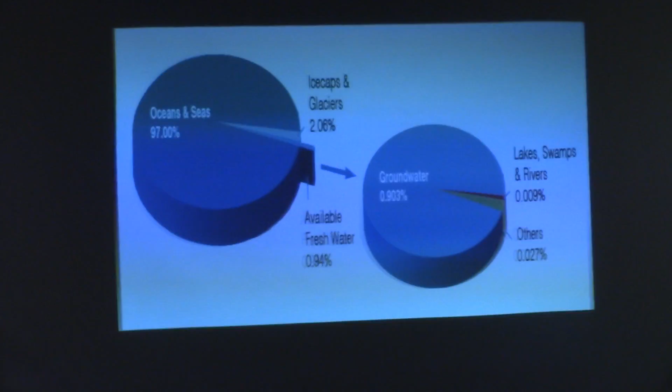97% of the water in the world is in the oceans. That's a whole lot of water. I googled the other day how much water is in the oceans, and there's this number with a whole bunch of decimal places and exponents — it's ridiculous how much water is in the oceans. And maybe not here, but in a lot of places, water is a super scarce thing. So why not pull water from this unlimited supply we have from the oceans? The answer is because it takes a whole lot of energy to do that. So if we can use waves to do it for us, we can probably get really good access to this kind of water in a lot of places.

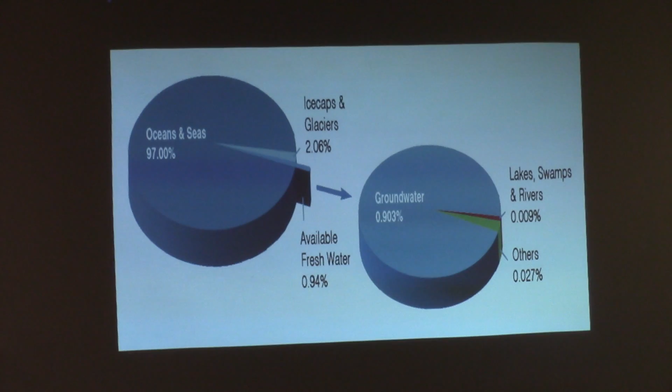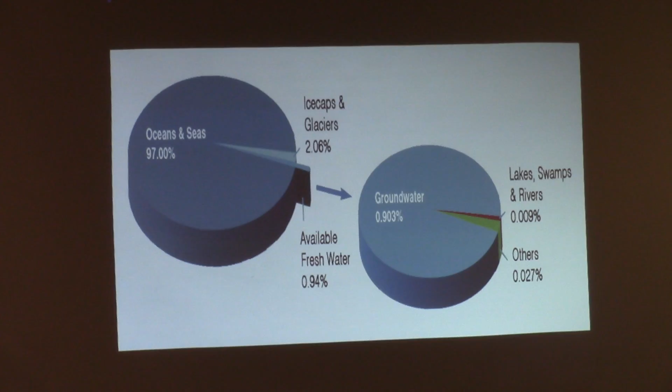So 97% of the world's water is in the oceans. A little over 2% is locked up in ice caps and glaciers, and less than 1% is available fresh water. So less than 1% of all the water in the world is fresh water — not even necessarily drinkable, but something like water in a lake. There's a whole lot of ocean water out there, and not a whole lot of fresh water. I'm not even going to talk about groundwater, or the tiny bit of water in lakes, swamps, and rivers — there's a lot of groundwater, but let's skip that.

This is Huntington Beach — I thought this was a cool picture. You've got some guys catching waves, and then this big desal plant in the background. This is in California, and that's what a large-scale desalination plant looks like. I think this is a thermal desalination plant, judging by the stacks, unless that's a power plant. A lot of times they build desalination plants next to power plants, which is actually pretty cool — a perfect example would be the nuclear power plant in Brunswick, down in Southport.

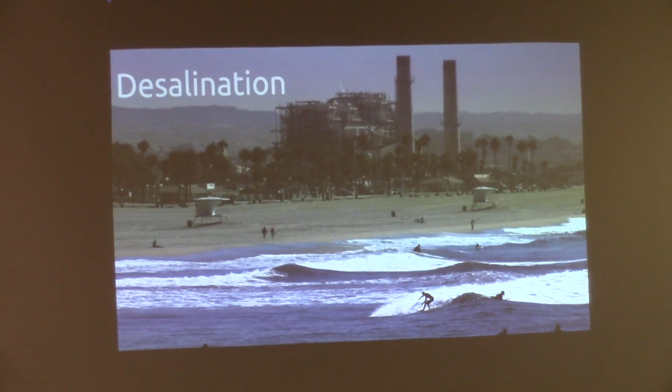It generates a whole lot of heat, and that's kind of a byproduct. If you've ever been in Southport and seen those canals running through it, with a couple bridges crossing over this really straight canal — what happens is the power plant sucks in river water, uses it to cool the plant, and then this warmer water comes out and runs through the canals to cool down a bit, before being pumped out offshore in front of Oak Island. That's just what needs to happen for a power plant right now — it's called residual heat removal.

Desalination, there's a few ways you can desalinate water. You can use a membrane, or you can simply boil water. If you could use that waste heat from a power plant to boil water, it's a pretty cool use of it, because otherwise it's just something you're going to throw away. So a lot of times we see power plants built right next to desalination plants, and the desal plants will use the waste heat. It's the same way in the Navy on submarines: they have nuclear submarines, and they'll use the heat from the reactor to run a distillation system which boils water, and that's how they make water for themselves on submarines.

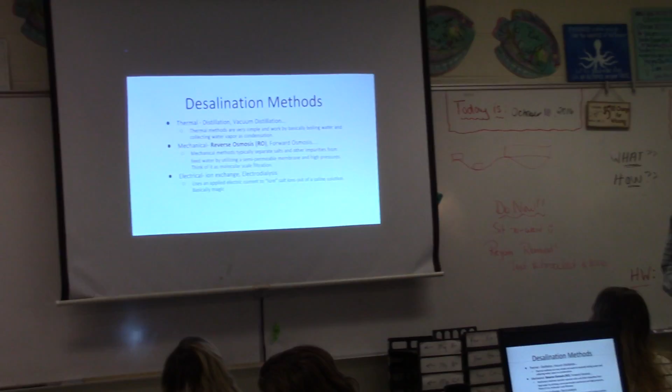So there are three main types of desalination: thermal, mechanical, and electrical ion exchange. Thermal is really simple, you're boiling water and you get steam, that's water vapor that comes off. Think about making ramen, and you lift up the lid of the pot, and there's all those water droplets on the lid. That's all really clean water, and if you can collect that really clean water, you can drink it. So that's how thermal desalination works, by basically boiling water and collecting the vapor.

You can also use vacuum distillation. Did you know you can boil water at room temperature? Does anybody know how? Yeah, reverse pressure, like a vacuum. So if I were to take this bottle of water and hook a vacuum pump up to it, the bottle would probably crush before this happened, but the water could just start to boil right here at the table because you're taking out the air pressure that's pushing down on the water and holding it all together, and the water will just kind of fall apart almost and boil right there at room temperature. That's a way some people can desalinate water, by hooking a vacuum up to a bunch of water, and then it boils at room temperature, and you collect the vapor, and you have water.

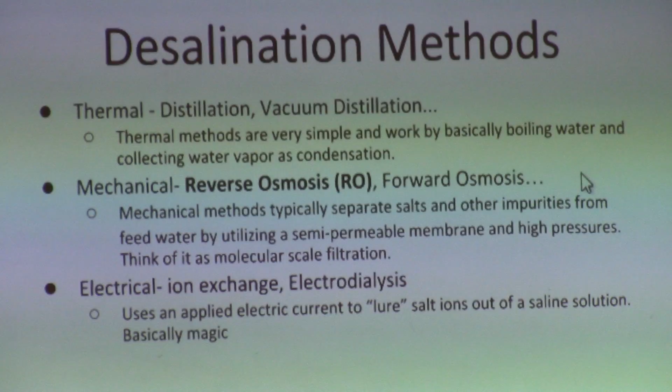Mechanical means are basically membrane-based methods, like reverse osmosis and forward osmosis. This is a little weird, ion exchange also uses a membrane, but we'll pretend that's not there. Basically these mechanical means use a membrane, and I'm going to pass these around in a second, so the next slide shows how membranes work.

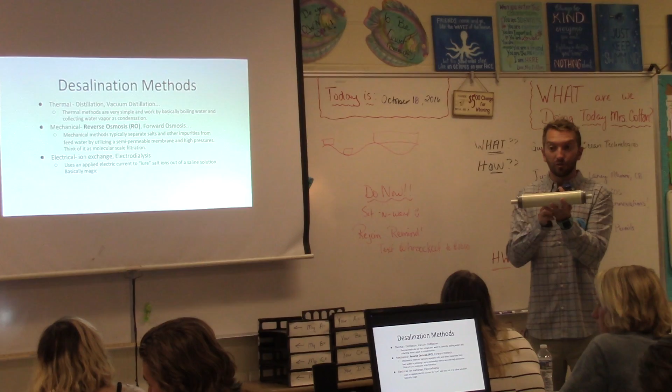These membranes are essentially like molecular-sized filters. You have salt molecules, which are kind of big and bulky, and water molecules are a little smaller, and they're attached. Salt really likes to be with water, which is the reason it takes so much energy to separate them. If you force really high-pressure seawater into this membrane, that pressure through reverse osmosis causes the salt bonds to be ripped, or the salt to be ripped apart from the water molecules, and water molecules can permeate through this membrane and collect in the center as fresh water, and you get clean water out. I'll get into more detail about that in a second.

I'll pass these around. And then the last kind, which is more of a lab technology, I'd say, like lab scale experimental technology still at this point.

There's some places that kind of use it, but electrical means could be ion exchange or electrodialysis, where salt has a charge. Salt is an ion, so if you put voltage in water, you can cause salt to want to be over on one side of a vessel, a container you could say, and the fresh water stays on this side. So you can actually attract salt molecules away from water using electrical charge. It's basically magic, and it's not super commonplace at this point.

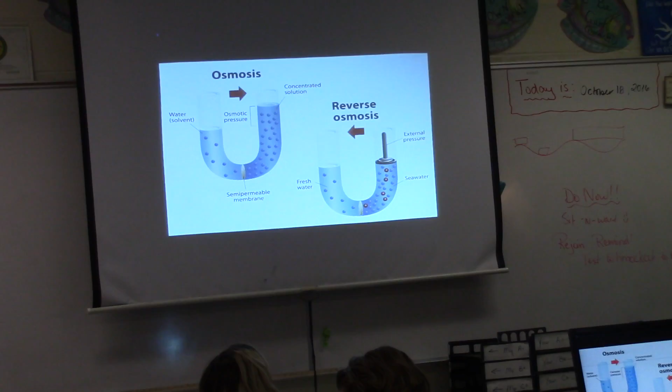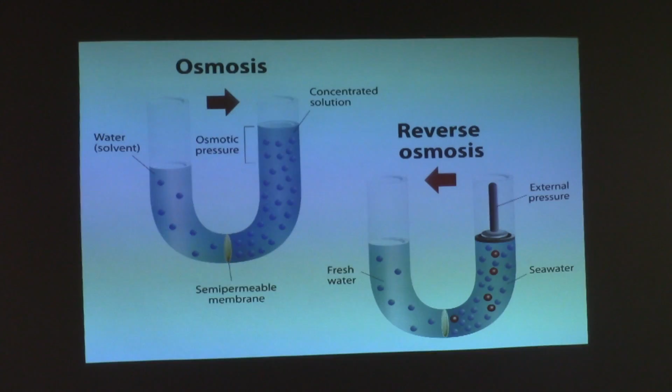So reverse osmosis, did you guys talk about osmosis in biology? Yeah, so it's like how liquids permeate through a cell membrane, and it's because a liquid of higher concentration... if you have a liquid of high concentration, like here, there's a whole lot of stuff, we'll call it salt, on this side, and then low concentration, there's less salt on this side. These two concentrations want to even out just by osmotic pressure.

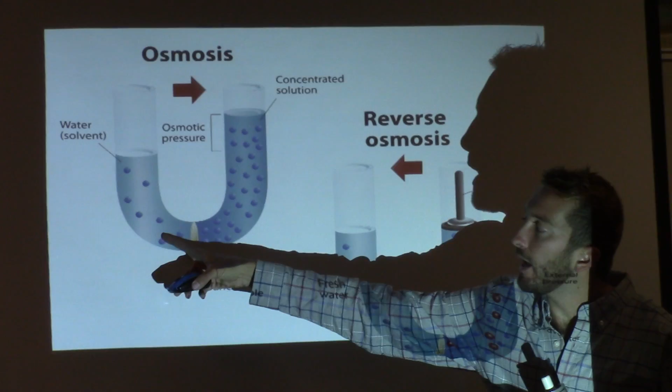The salt wants to pass through this membrane and balance out the two solutions, and that's called osmotic pressure. In the case of seawater, that's about 400 psi. So just putting two different concentrations of water on either side of the membrane, there's like a 400 psi differential pressure in between that membrane trying to keep the two apart.

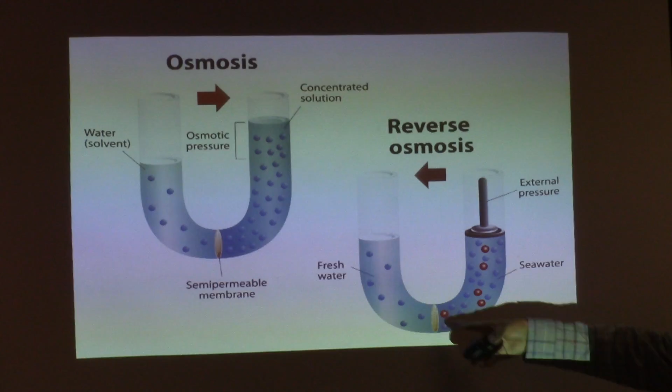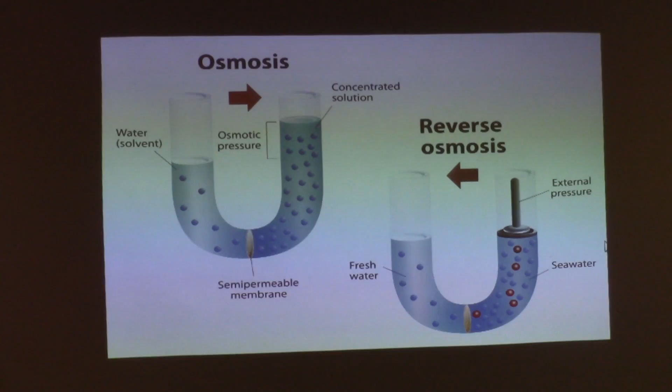It's really crazy. So reverse osmosis is, as it sounds, the reverse of that. If we have a lot of salt here, say seawater, and fresh water here, with this membrane, and you push really hard with like 800 psi, you can overcome that 400 psi differential pressure that's trying to push everything the other way, and you can actually separate the salts out in the reverse direction. The easiest way to think about it is like molecular filtration, but it's chemically a little more advanced than that. Honestly, it's kind of over my head how the chemistry in this thing works.

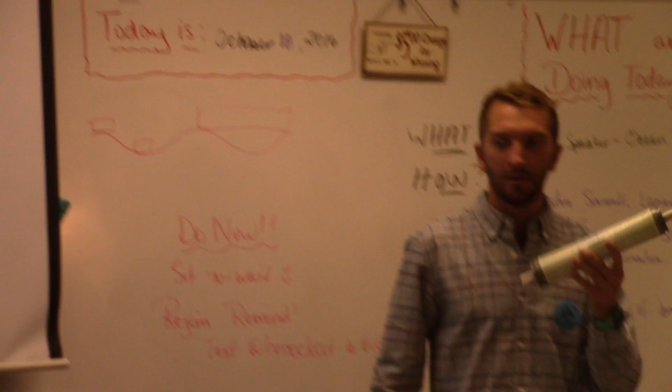So this is a reverse osmosis membrane, I'll pass these around. These are literally exactly what we found on a yacht. A lot of high-end boats will have water makers, a lot of sailors that go out on long trips don't want to bring their water with them, so they'll have water makers on board. I think this is a 150 gallon a day membrane. I'll pass these around if you guys want to see them.

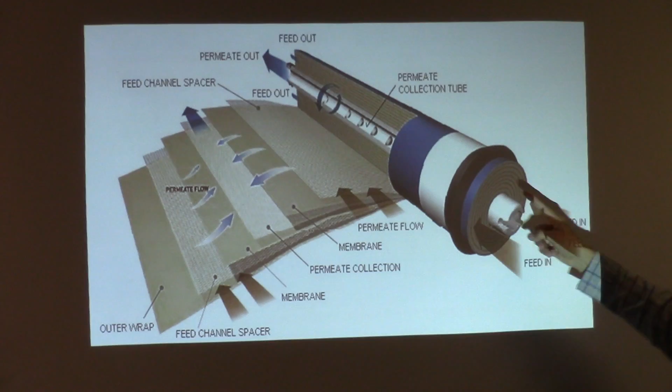What happens is you feed water into one end of the membrane. There are holes here, this one's kind of wet, and you pack in a whole bunch of seawater into this side, and then water makes its way down the membrane. There's a spiral wound element, and each of these spirals are different layers of membrane that fresh water is able to permeate through — basically it's like a sandwich.

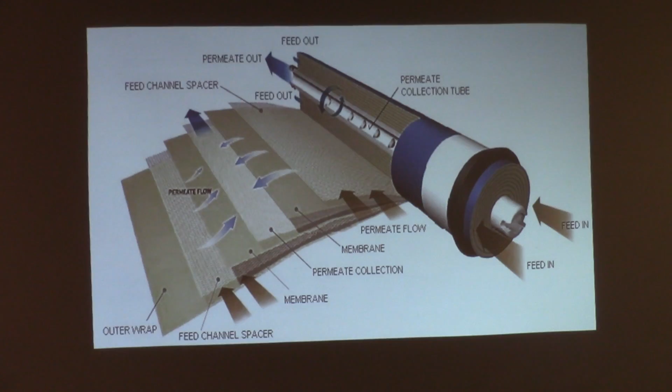Say that this is one leaf of a membrane. Fresh water passes through this membrane and makes it into the center of this layer. Then from the center of this layer, it spirals all the way around until it gets into the center tube — that's where the fresh water comes out. So if you were to hook this up to a real system, you put feed water, seawater, in this end, you get your fresh water out of this end, and out of these holes you get your brine.

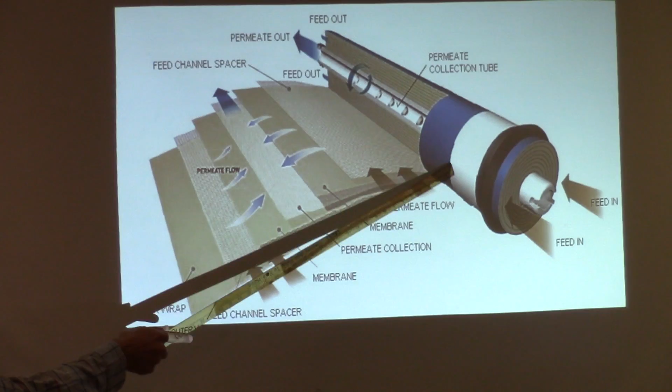As the water enters here and passes down the membrane, fresh water starts to seep out through these membrane leaves. By the time the seawater gets to the end, a lot of the fresh water is gone, so this is where your salty water comes out.

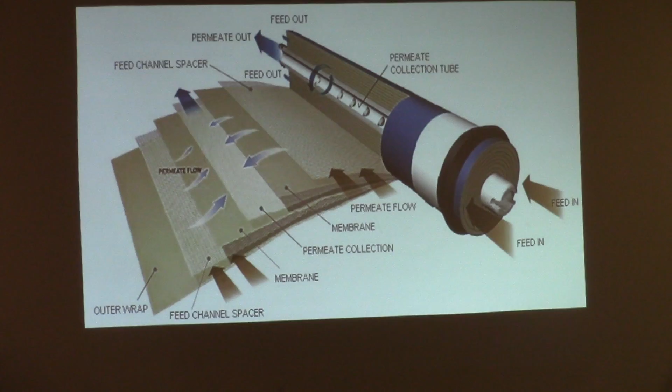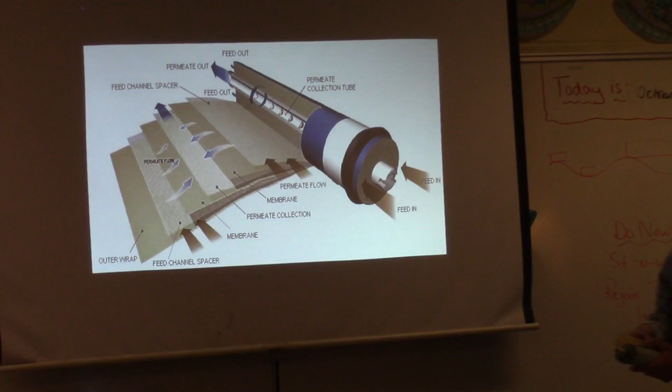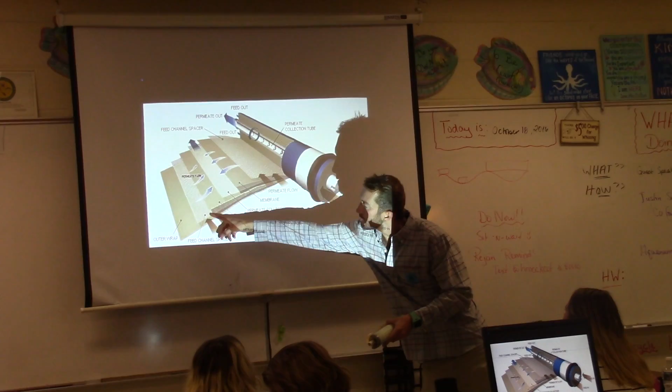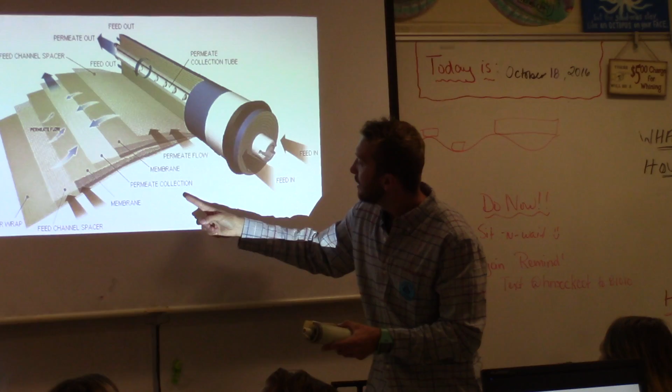I forget what material the membranes are made out of, but it's crazy how they make these things. You have a few different parts to the membrane. You have the actual membrane itself, which has a paper clip on it in this one. Then you have what are called feed spacers, which are like meshy materials — a feed channel spacer that allows the water to work its way around the membrane and cover the membrane area. And then you have a permeate spacer, which is kind of the pathway for the permeate collection — a pathway between the two membrane sides that allows the clean water to travel through to the center tube of the membrane. You guys can check these out as well if you want to see them.

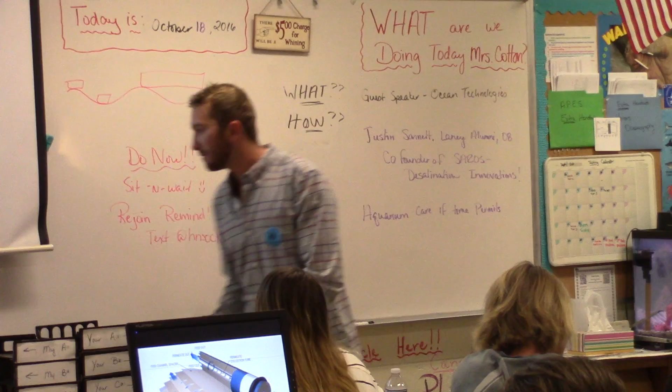The ones that we're going to be running in the latest buoy are 40 inches — I think it's just one. These are 2.5 by 14-inch membranes. The ones we're going to run in the latest one are 2.5 by 40, so it's the same diameter but about 40 inches long.

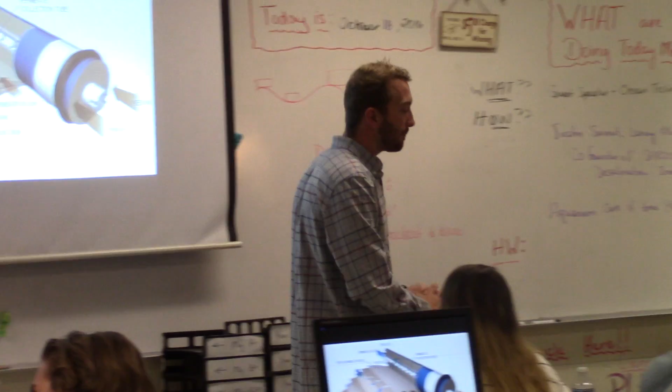This one is 36 inches long; others are longer. If you treat them properly, they're good for about 5 years. We're not going to treat them really great, just the way our system runs, so we may get 3 years out of them. They're not super expensive — those membranes right there are about $150.

So if you can get 3 years out of $150, it makes economic sense. And how you treat them well is you just remove a lot of the junk that's in seawater before it can get to the membrane. So we have pre-filters that remove sediment, plankton, sand, whatever, before it gets into the membrane.

So whenever the 3 years is up, do you replace all of them, like all the membranes and lines, or just part of it? On our system, the membranes are on land. The only thing that's out in the ocean is the pump, which is kind of the engine for the process. That's cool because when you replace the membranes, you don't have to have a guy go out there with a boat to switch them out. You just take 2 screws out, pop the cap off, and those things slide out of this tube, and you swap new cartridges in.

So how long are the buoys good for? Do you have to replace them, or are they good for a long time? Each buoy is designed to last about 10 years, and that's what we're basing the economics of the system around.

We need to know how long it will last to figure out how much our water costs, because if you have to replace the buoy halfway through, it makes it more expensive. Our buoys are designed to last about 10 years, and they'll probably need a biannual, every-2-year kind of overhaul where you replace a couple components. Simple stuff—we're making sure the buoy is ultra simple. If a part doesn't need to be on the buoy, we're putting it on land. So the only things that are on the buoys are there because they need to be there, and anything that needs to be worked on can be fixed by anyone. That's really a strong focus we're trying to make sure of.

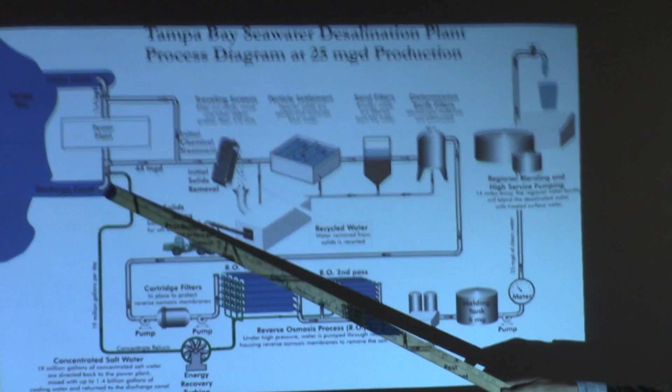This is a large-scale desalination plant, to walk you through the process. So you have the ocean, and then intake tubes that suck in seawater. It goes through a strainer, which basically removes sticks and stuff, so you're not sucking in seagrass.

Then they put that water into a settling tank, which is literally like a swimming pool, where the water sits at very low current and sediment falls out of suspension, so you get this mud at the bottom. Every now and then you have to go in there with a bulldozer, drain it, hose it out, and drain out all the sediment. What that does is allow sand and stuff to fall out.

This is how a large-scale plant works—this isn't how ours works, we don't have a settling tank in our system. From the settling tank, you run it through sand filters, like a swimming pool would use. Then it goes into diatomaceous earth filters—not super common, but basically these remove sediment from the seawater. Then it gets pumped to a really high pressure pump, goes through more filters, and then into the reverse osmosis membrane.

In a lot of plants you won't see just one membrane—you won't see one membrane in a Carlsbad plant. I think they have like 20,000 membranes in that thing. It's crazy, so you'll see banks of membranes. The seawater goes into these membranes, and then it's separated out into freshwater.

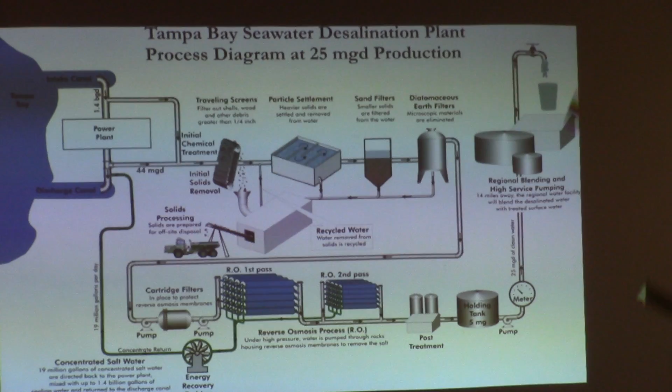So these tubes are the freshwater that go into a post-treatment and a holding tank. A post-treatment might add a little bit of chlorine, like city water has a tiny bit of chlorine just to keep it sanitary. They may actually remineralize it in some cases.

Sometimes with reverse osmosis, if you run it right, or long enough, the water can be so clean that it doesn't have any minerals in it, and that's called aggressive water. What that means is that if you put it in a pipe, the water wants those minerals so bad it'll steal them from the pipe, and then the pipe will start to fall apart.

And that's actually part of what happened in Flint, Michigan, with that water issue they had. They had mineral leaching, and then they tried to fix it by injecting another chemical, and they put too much of that chemical, which messed things up. But anyways, that's what post-treatment can look like, and then you've got your fresh water here.

But this is something cool I wanted to mention. This is called energy recovery, specifically an energy recovery turbine. This is really sweet. Of all the water that comes into the membrane, maybe 20% comes out as fresh water. The other 80% is still 800 psi seawater, and because it's at 800 psi, it still contains a lot of energy. Otherwise, you'd just blast that back out into the ocean and waste that energy.

What an energy recovery turbine does is take that high pressure exhaust, basically that waste product, and use it to spin a turbine, which generally helps push the pump along. So it uses the pressure still in the waste product to help move the pump that builds new pressure—it recycles energy.

It's very similar to how a turbocharger works in a car, using waste exhaust gas to help pump new air into the engine. It's kind of the same thing for reverse osmosis. With this, you can boost efficiency, almost quadruple it, sometimes by factors of 6. We have energy recovery in our system, which is really, really sweet.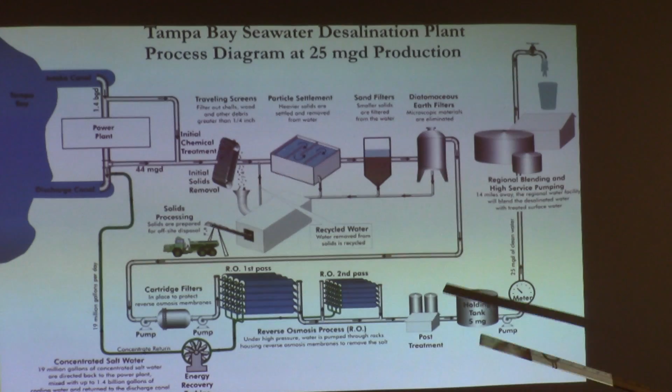So, all right, cool. How much time do we have left? 30 minutes? Well, not quite—the bell rings at 8:29 now. Okay, well then we'll go right into ocean energy then, because this is really cool. It's probably my favorite part of the whole presentation.

This is what ocean energy looks like. You may look at the ocean and not think there's energy in there, because a lot of people think energy is just electricity. But energy comes in all kinds of forms—you probably learned this in physics. You can have thermal energy, electrical energy, kinetic energy, potential energy. Energy comes in all these different forms, and in this case, that's energy—just moving water.

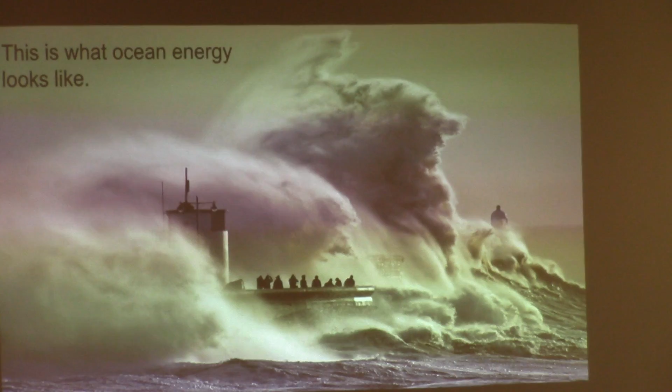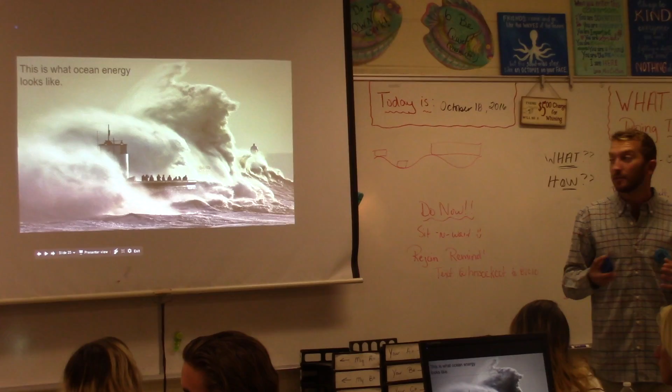Think about a hydroelectric dam, how they take moving water from a river and use it to spin a turbine and generate power. It's a kind of the same process with ocean energy, but they use the motion of waves and tides in different ways to spin a generator or move pumps and things like that.

There are 3 main types of ocean energy. Tidal is pretty self-explanatory—it uses the ebbing and flowing of the tides to generally spin a turbine, like a wind turbine. Just as a wind turbine uses air current to spin a big fan, you can use tidal current to spin an underwater fan and generate power. It's really similar to traditional hydropower.

Wave energy uses the kinetic energy of ocean waves, the motion of ocean waves—that's what we use for our system. The ocean is always moving, and there's kinetic energy there that you can harvest and put to work. Then there's ocean thermal energy conversion, or OTEC, which generates energy based on the temperature differential.

You guys probably talked about thermoclines. I learned that word in third class. There's a big temperature differential between deep cold water and warm surface water, and believe it or not, there's actually a way to get energy out of that, which is also kind of like magic.

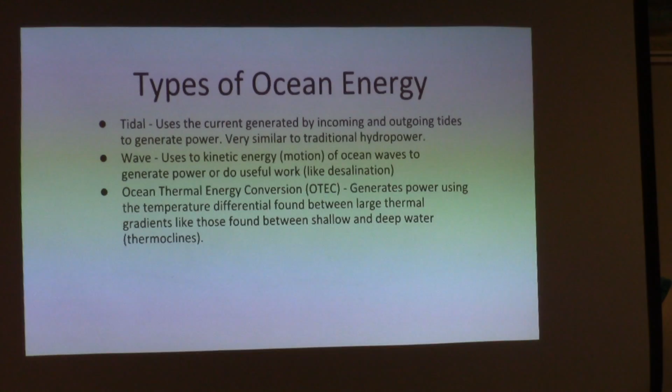And I'll go through that in a second too. So there's challenges to ocean energy.

The ocean energy industry is kind of in its infancy, and its technology is still being developed. Just like we're out in front of Massachusetts ironing out wrinkles with our buoy, people are doing the same thing with their technology. So corrosion is an issue, storm survivability is an issue. There's biological things that are an issue, like the barnacles, and the environmental impacts that need to be studied.

Cost and economics are big issues right now. For corrosion, if you can make everything out of stainless steel on your device, it would last forever, but that's really expensive. And if your machine is really expensive, there's no way the power you're generating is cost effective, because your machine is just so ridiculously expensive to make.

Predictability is one that people are working with. It's an advantage to tides because tides are very predictable. Tides come in 4 a day, 2 high tides and 2 low tides, and they're really predictable. My watch will tell you what tide it is, and it's not connected to Wi-Fi or anything - it just knows what the tides are supposed to do.

Where waves aren't very predictable - waves are always changing. And that's a challenge, because if somebody needs a lot of power and there's no waves, they have to find some other way to generate it.

And then permitting and the unknown - that's the thing I was talking about, they just don't know the effects of some of these yet. Like I said, I doubt there are going to be any serious effects, people just don't know what any effects would be.

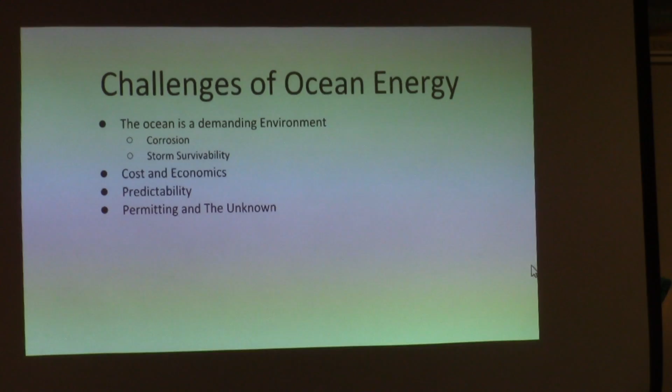So tidal power, I'll play this video. Take a breather, that's it. This is what your stereotypical tidal power concept would look like - it's basically an underwater wind turbine.

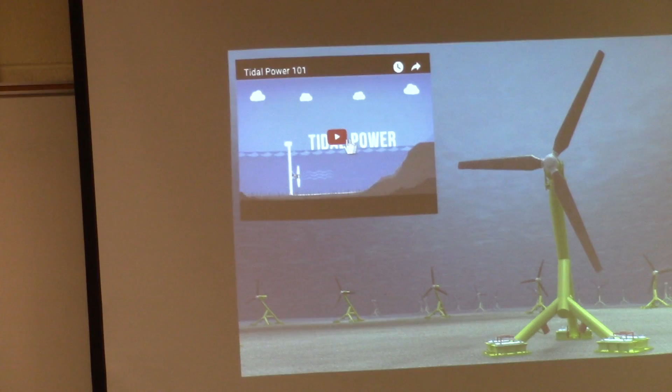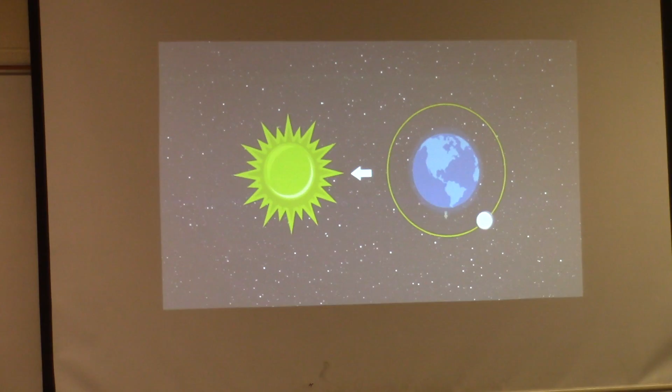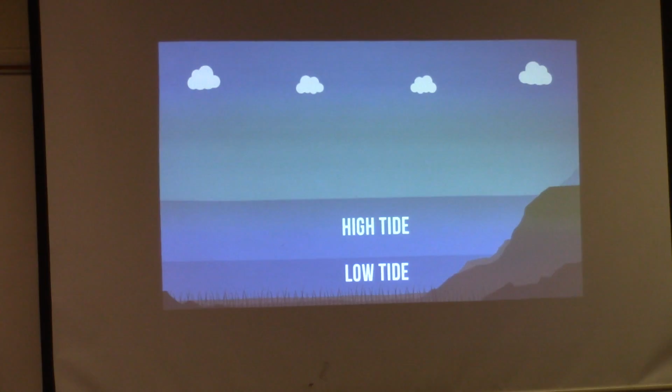Tidal power is a form of hydropower that converts the energy from the natural rise and fall of the tides into electricity. Tides are caused by the combined effects of gravitational forces exerted by the moon, the sun, and the rotation of the earth. Tidal plants can only be installed along coastlines. Coastlines often experience 2 high tides and 2 low tides daily. The difference in water levels must be at least 5 meters high to produce electricity.

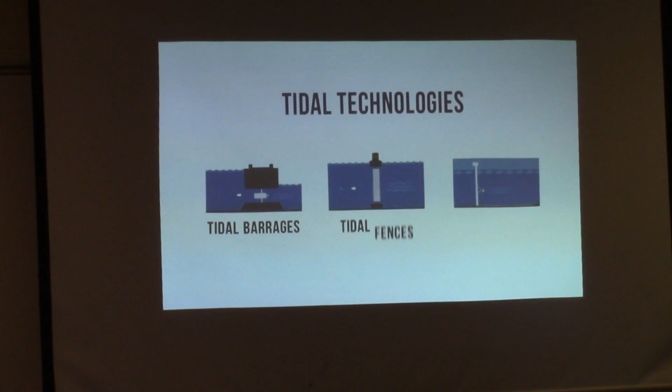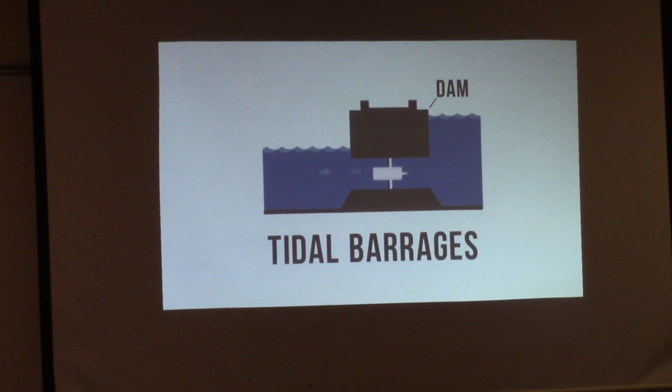Tidal electricity can be created from several technologies, the main ones being tidal barrages, tidal fences, and tidal turbines. Tidal barrages are the most efficient tidal energy sources. A tidal barrage is a dam that utilizes the potential energy generated by the change in height between high and low tides. This energy turns a turbine or compresses air, which in turn creates electricity. Tidal fences are turbines that operate like giant turnstiles, whereas tidal turbines are similar to wind turbines, only underwater. In both cases, electricity is generated when the mechanical energy of tidal currents turns turbines connected to a generator.

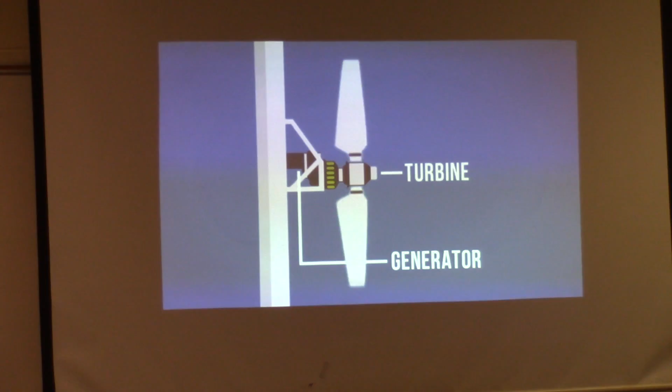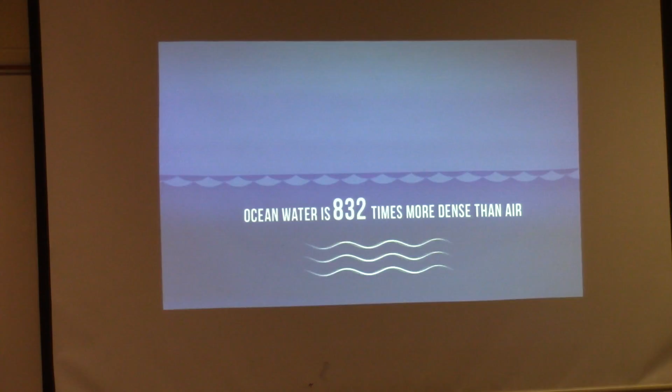The generator produces electricity. Ocean currents generate relatively more energy than air currents because ocean water is 832 times more dense than air and therefore applies greater force on the turbines. Tidal power is easy to install and renewable, having no direct greenhouse gas emissions and a low environmental impact. Because the ocean's tidal patterns are well understood, tidal energy is a very predictable energy source, making it highly attractive for electrical grid management. This sets it apart from other renewables that can be more unpredictable.

However, adoption of tidal technologies has been slow, and so far the amount of power generated using tidal power plants is very small. This is due largely to the very specific site requirements necessary to produce tidal electricity. Additionally, tide cycles do not always match the daily consumption patterns of electricity, and therefore do not provide sufficient capacity to satisfy demand. That's tidal power.

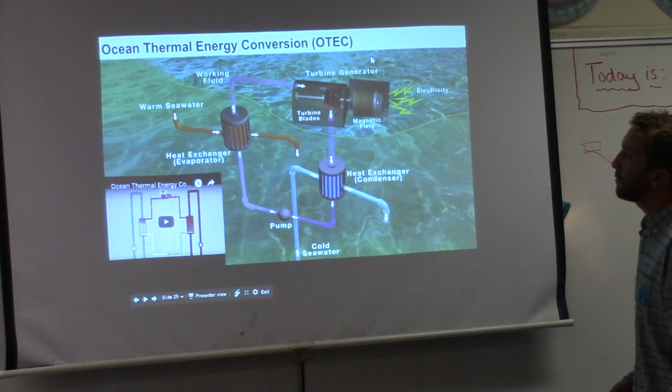So this is ocean thermal energy conversion. This is the next thing we'll talk about, and this one's kind of like magic. It uses the temperature differential found in the deep oceans and shallow oceans to generate power. This one's kind of wild.

Remember how I said water can boil at room temperature if it's under a vacuum? Well, there are things you could fill that water bottle with that would just boil away right now, even if there was no vacuum — like ammonia byproducts, for example, the refrigerant that's in air conditioners.

This kind of works like, it shares very similar concepts with how a refrigerator works, called vapor compression refrigeration, or like an air conditioning system in your car. It uses a fluid — see this purple loop? It's filled with a fluid that will actually boil at room temperature, like a refrigerant, like ammonia.

What they do is use warm seawater, pumping this fluid through a warm heat exchanger, which causes the fluid to boil and expand, basically turning into ammonia steam. That ammonia steam runs through a turbine and spins it to generate power. Then they take that warm ammonia steam and cool it down using cold seawater pumped up from the deep ocean. That condenses it back down into a liquid, and the cycle begins again as they pump that cooler ammonia back into the warm heat exchanger to boil it and spin the turbine again.

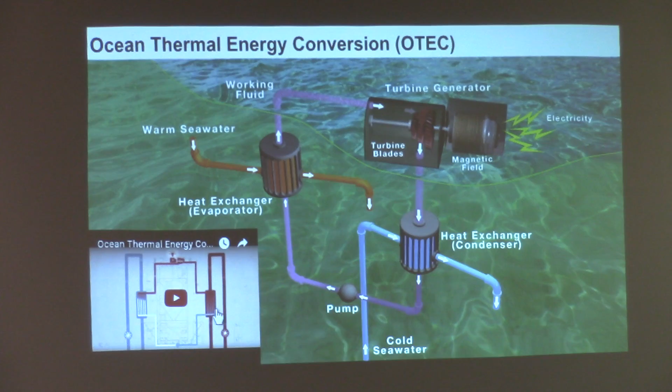This one's really cool — there's a plant in Hawaii, which I just learned about when I saw this video last night. But it's still not widely adopted as of yet. I think I'm going to skip through a lot of this video.

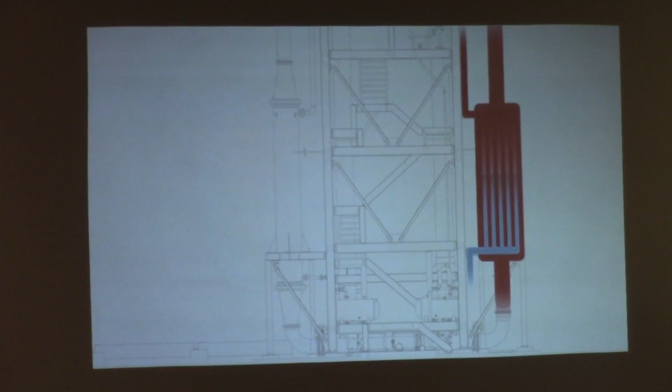That's what the plant looks like. I really like these guys' shirts, they wear Hawaiian shirts. The company is called Makai Ocean Engineering, based in Hawaii. Being able to provide for the total energy needs of the planet, and to do it with no carbon footprint, is a worthwhile goal. This is where we're separating the ammonia from the seawater — this is a heat exchanger, basically like the radiator in your car, these are called evaporators. What's coming out is high pressure ammonia vapor.

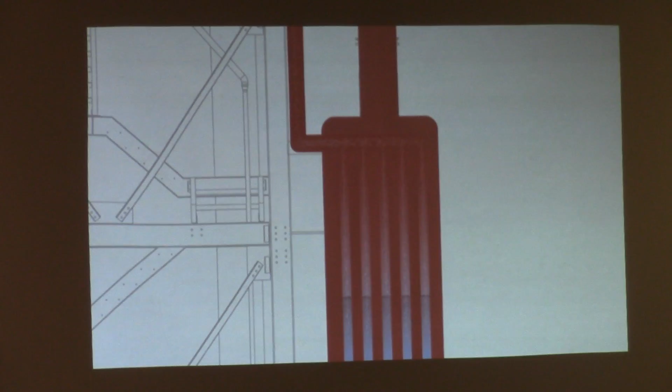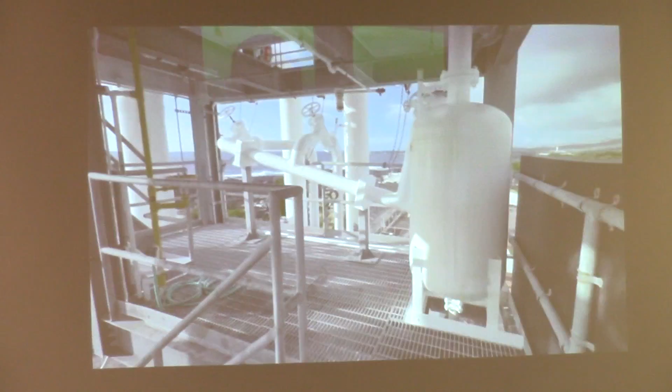So the warm seawater has gone into the heat exchanger and heated up that ammonia — it's boiled it, so now it becomes really high pressure steam. How do you boil a fluid with warm seawater? It's at room temperature, so how does it boil anything? The answer is you pick a fluid that has a low boiling point.